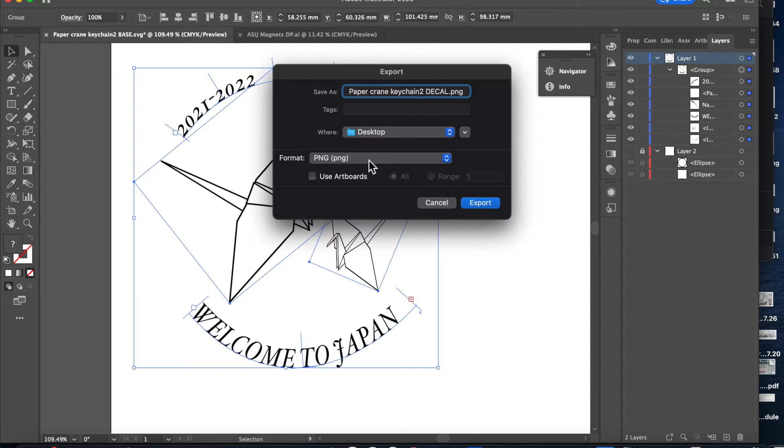Make sure you have a png format here, and when you see export, it should give you this heads up, and it'll look like black on a transparent background. That is exactly what you want, and you want to make sure that this is 300 pixels per inch. Nice high quality. Hit OK, and now you have two files that you can bring into Fusion.

The other thing that you might consider is now would be a good time to bring additional graphics into the Read Class Resources folder, right? So feel free to do that as well.

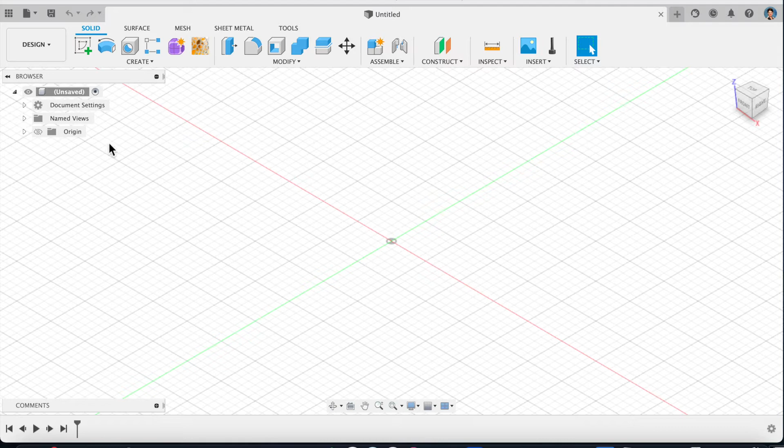Now that you have the two files, you are going to create your digital render for the catalog. To do that, make sure that your origin is visible. So over here, origin is visible, and it gives you some planes. Then you're going to insert an SVG to start with.

This is the base of your form. So there is my base. And I'm going to select one of the vertical planes for us to work with. You see that lines up right here, and if we're looking at it on the right side, this is lining up very nicely.

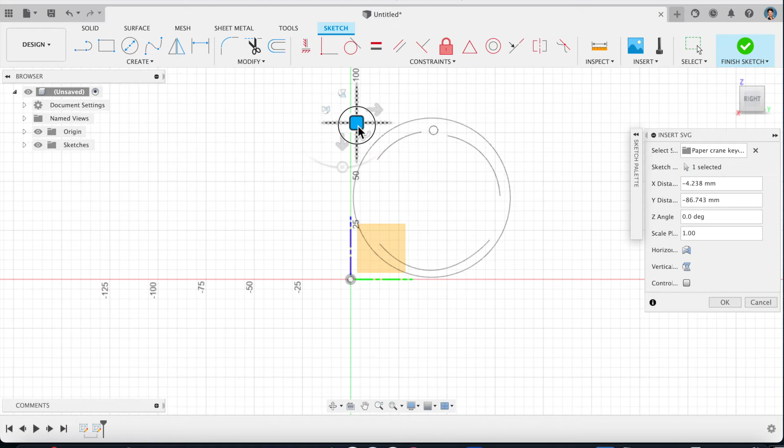We want to make sure that this is up here on the ground plane, so just about touching the red line here. It's fine if it's hovering a little bit, but we don't want it to cross that line. Okay, then we're going to say OK. That's all we need to do.

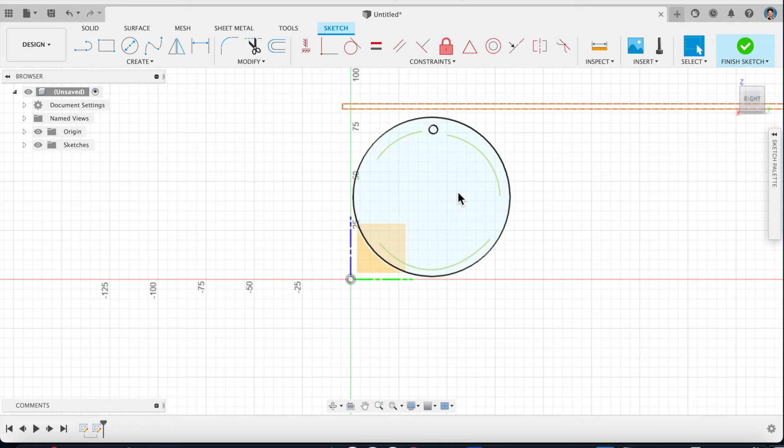Now what we want to do is select just the part that we want to turn into wood. So if we click here, you can see the blue form. This is going to work for us, so we can finish the sketch. Click on that blue area and then hit the Q key, and that gives us the press-pull, right, the extrude.

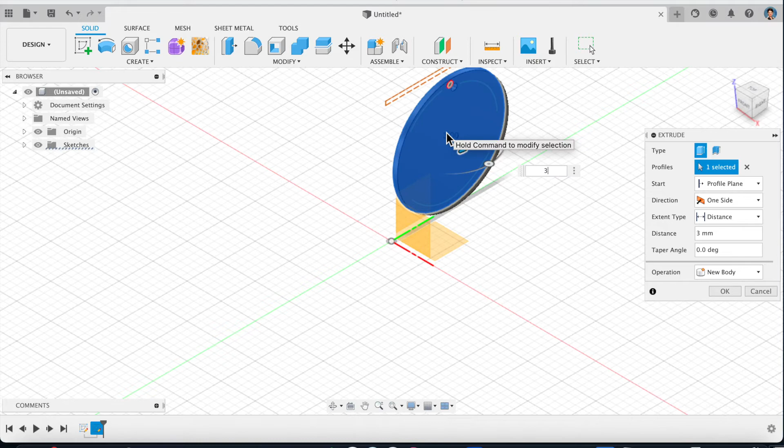Then you're going to type in 3 millimeters, and it will be 3 millimeters thick. Okay, there we go, and we can see that we have the ornament right there. Okay, so that's part 1.

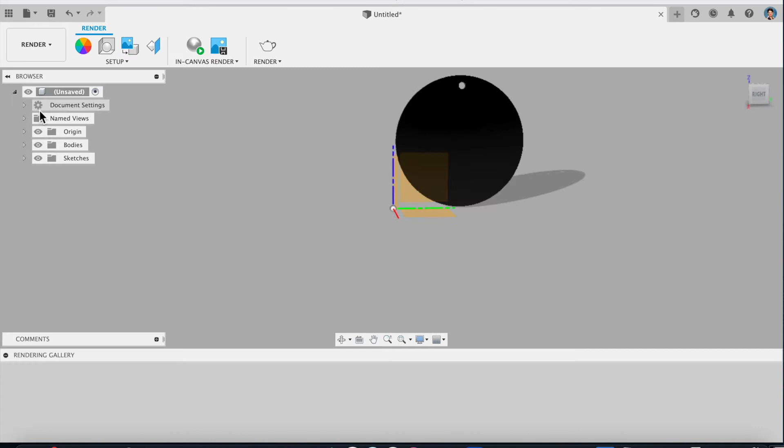Part 2, we are now going to render. So we're going to go over to render, and we're going to do a couple of things. We're going to go to setup first, our scene settings. This is really dark, right? So there's a couple things going on.

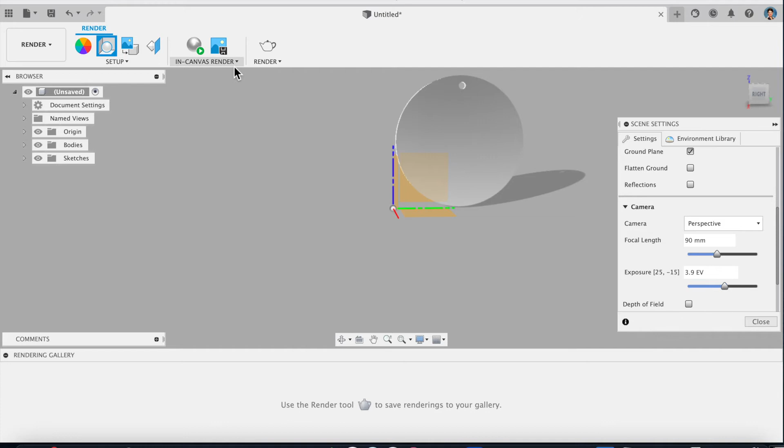One, you can make it a little bit brighter. Oops, that was a lot brighter. But we're going to go down here to exposure, so the EVs, and we're just going to make that light gray for a minute, so that when we then go back to the appearance to grab the wood texture.

When you go looking for your materials, you're going to scroll down to wood or wood solid, the unfinished. Either the oak, I like this texture. So this looks pretty much like the material we'll be using, so you can drop that right on there.

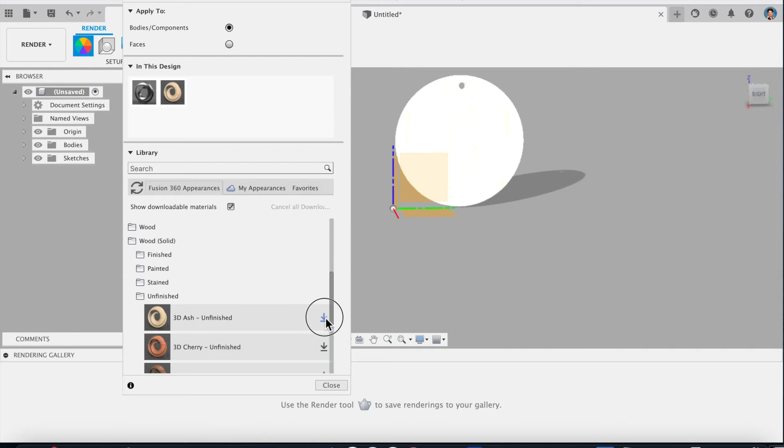If you haven't downloaded it yet, remember you just need to click the little arrow and you can download any of these materials. Like I could grab the ash if I wanted to. See, now I have that downloaded, and I could drop the ash right on there.

Now I'm going to minimize appearance, go back to setup, scene settings. Okay, and that's white, so that's really bright. I'm going to go back down here to exposure and bring this down until I can see the wood at about the tone that I want.

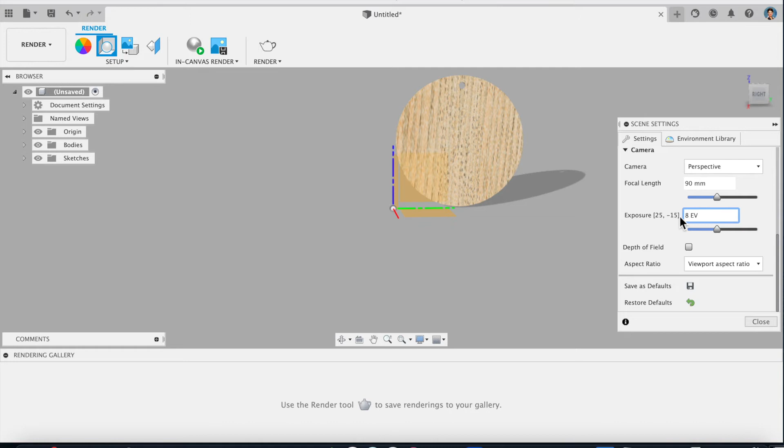That doesn't look too bad. 8.9, 7.6, somewhere in there. Let's try 8 EV. Oh, looks nice. Okay, a little bit bright, a little bit there. I've got the shadow coming around the back.

That's this position, right? When you position that, see how you can make the shadow go anywhere you want. We want to see that shadow a little bit. You may decide you like reflections, right? Get the reflections here, that's fine.

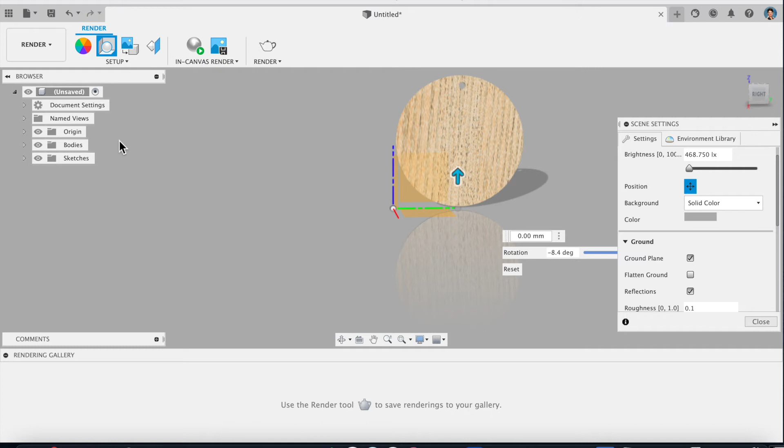When you're doing all of this, you can blink the origin again, so all we see is the product. Remember, this is for the catalog. Then we can close that, go back here and blink the origin again.

Now we're going to go back to design for a moment. This looks like the piece of wood. Yay! While you're back in design, we're going to add the decal.

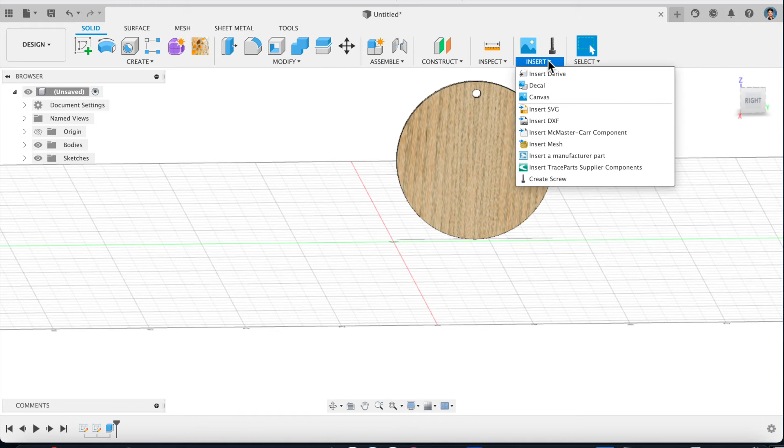Now, you can add a decal in render, but I've run into some trouble with that, so maybe we should just keep it here. This is the decal for the front. And it's going to be like, well, where do you want it? I want it right here, please.

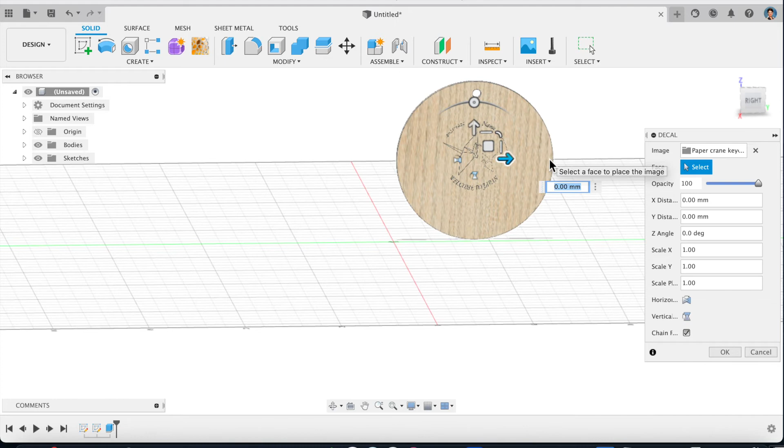Now, here are the controls for this. They're slightly different. This is your make it larger control, that little corner, curvy corner thing. And you can see I don't have it quite lined up. To line it up, we want to move from the center of that box, so the little corner, curvy corner thing will make it larger, smaller.

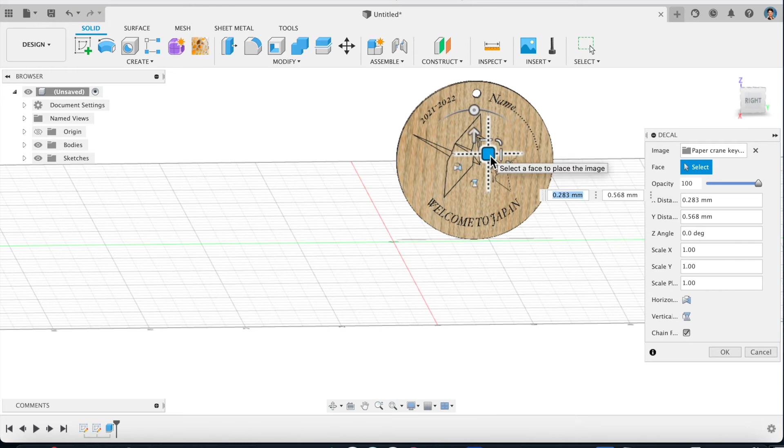The rounded box will let you move that around, and then you can just make sure that it is all lined up. Okay, so you can see this is what we're going to end up putting in the catalog, but we want to do this from the render screen.

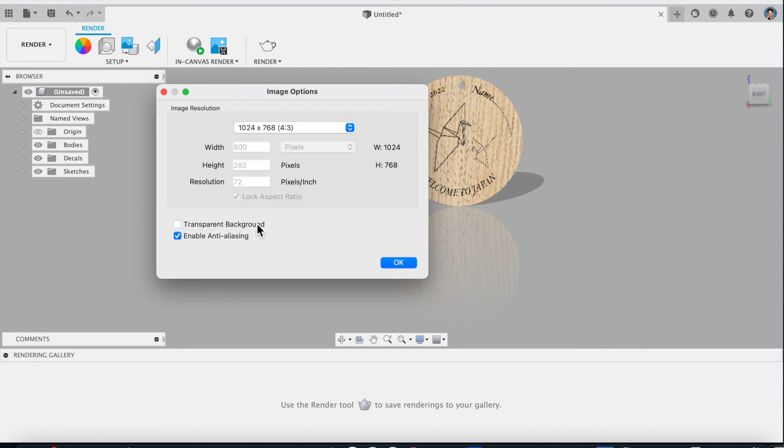We want to make sure that your capture image, if you're using the reflections and all, then we don't want a transparent background necessarily. We can keep the gray. That works out really nicely for this.

And we don't need it a very large file, so this is fine. If it needs to be, and actually it could be smaller than that, be fine. Okay.

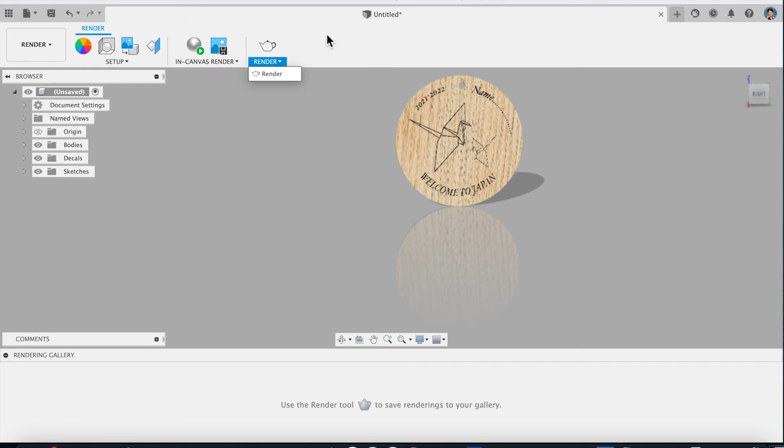Just going to do that for a second. You will then want to do an in-canvas render, right? And you want to make sure that this is maybe at a, not a total angle, but a little bit of an angle, so people understand that there's 3 dimensions to what's going on.

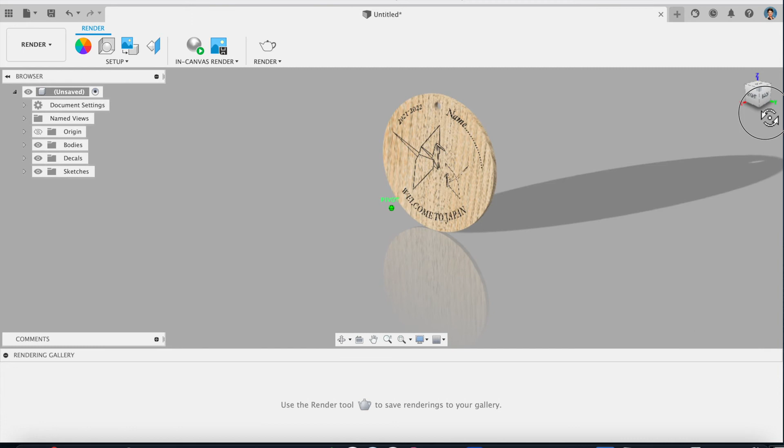You can see the shadow, right? A little bit of there. Oops, uh-oh. There we go, maybe tip a little bit down. Maybe keep it level, all good.

You can also zoom in a little bit, because remember, this is what the picture is going to be. So then we go back here and run an in-canvas render, and give it a minute so that you can get a slightly higher quality image.

And let it go 15 or 20 seconds. It's not too bad. We will wait here so that you can see all of it. And you really do want the speckles in the reflection to get taken care of, all of that sort of thing.

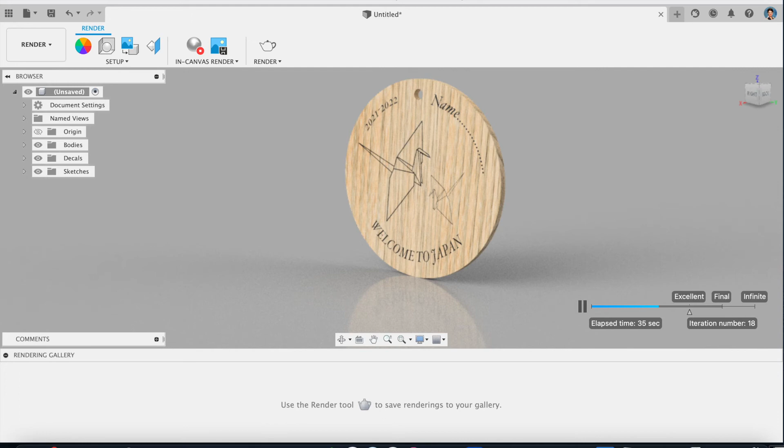Okie dokie, it's 35 seconds, that's not too bad. Then you go over here and you capture image, right? It is not a screenshot, it is capturing the image and saving it.

As that PNG file. And then we'll have a lovely picture. Now, the picture it captures is also going to have all this gray, so eventually you have to trim that.

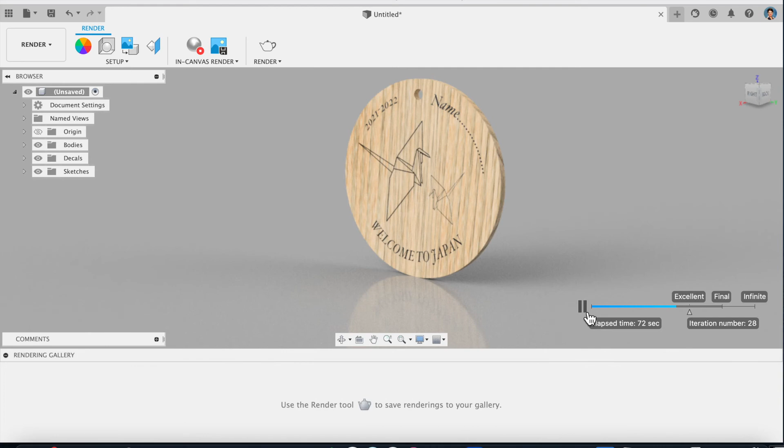I'm going to pause the render here. And then we're going to go over here to the product, and here, and date modified. Here we go. Oh, did I save it to my desktop instead? I perhaps did. Today, there we go, there it is.

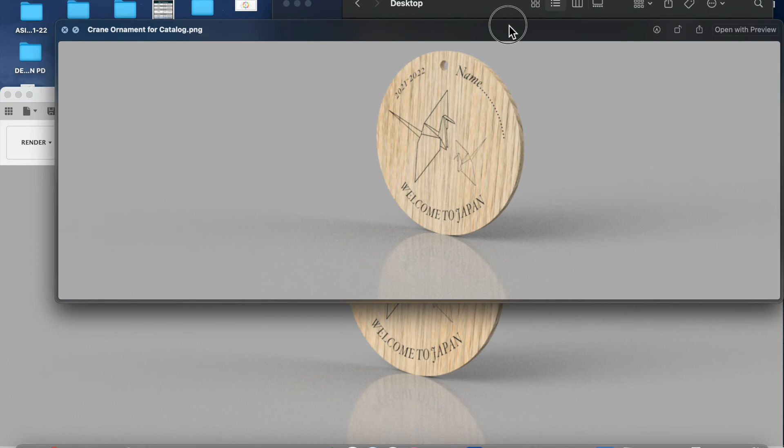So you can see that this is the full width of the screen, right? And that's not what we need. So just open that in preview, right?

And then to crop that so it'll fit nicely in our catalog, you can have a little bit of the reflection, but we don't want a lot of extra gray space, right? How's that look? And then do Command K to crop in preview. That looks pretty darn good.

If you felt you needed some additional adjustments under adjusting color, for example, if I wanted those black lines to show up a little more contrast, I can pull this up and get that to pop just a little bit more, right? So feel free to do that.

If you go too far, it just gets a little wacky, but you could control those. You could also, I can bring the highlights up a little bit. Nope, I'm going to move the white point a little bit. There we go, pop that out. Okay, great. And then you can save that again.

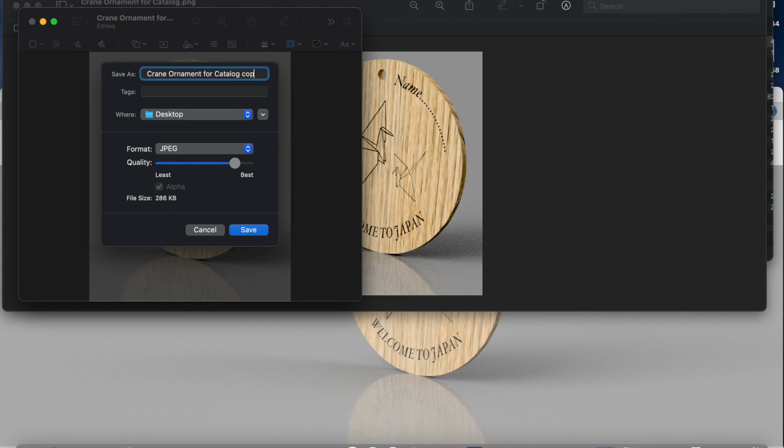And I'll do this crane ornament 2. Okay, and then I'll close that. I'll close that, and we are all good.

So now these are the things that we are going to put in our catalog, that we're going to put in our catalog of products here.

When we put this into the catalog, we need to say what it is, we need to say how big it is, and we need to say what kinds of customizations you need, right? Make sure that you have all of that thoroughly detailed, because that's where people are going to then come to our order form, right?